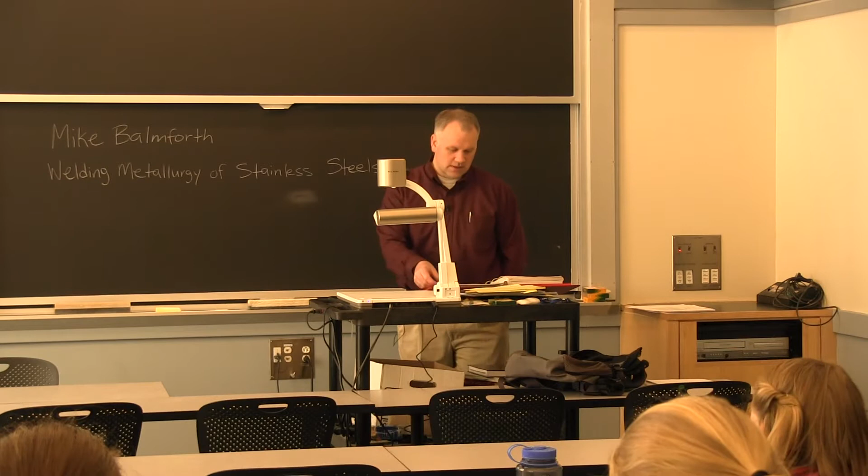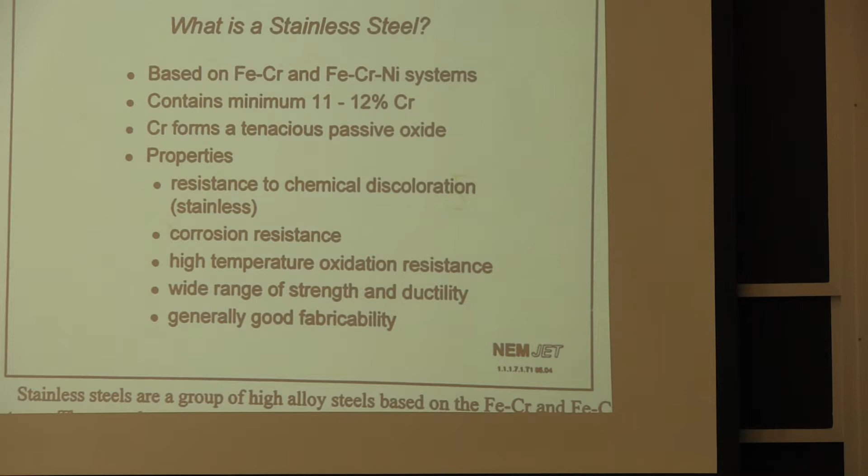So I wanted to start off by just talking a little bit about what is a stainless steel. Most of you probably, when you think of stainless steel, you think of this nice shiny silver metal that doesn't rust. And in most cases that's true, but stainless steel is not always stainless. There are things like sensitization, there are things like pitting, there are things like intergranular corrosion. If you mix up your stainless steel with your carbon steel and you get contamination, you can get rusting that way. And so as we talk about the metallurgy of stainless steel, we're going to be talking about things that could happen to that stainless steel to cause it to not behave like you want it to, which could be corrosion, could be rusting, it could also be cracking. There's a variety of things that can go wrong, and so we'll talk about some of those things.

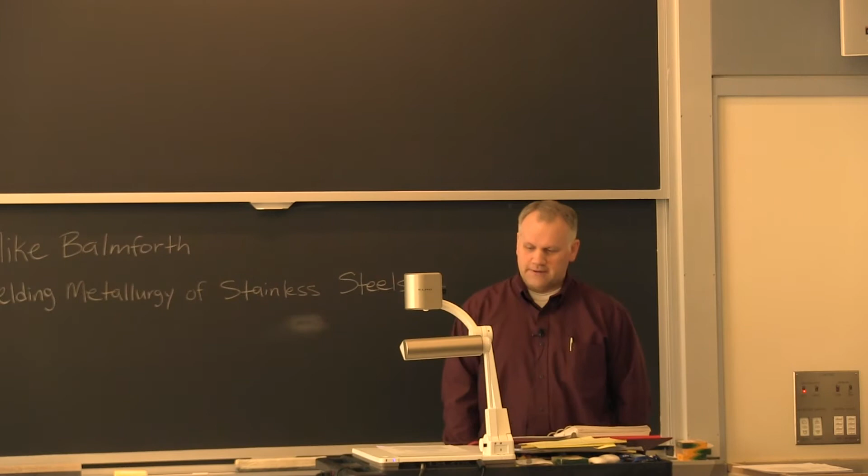But stainless steel, at its very basic sense, is an iron chromium alloy. And then many of the alloys also have nickel in them. And there's always going to be a little bit of carbon and a variety of other elements that we will talk about.

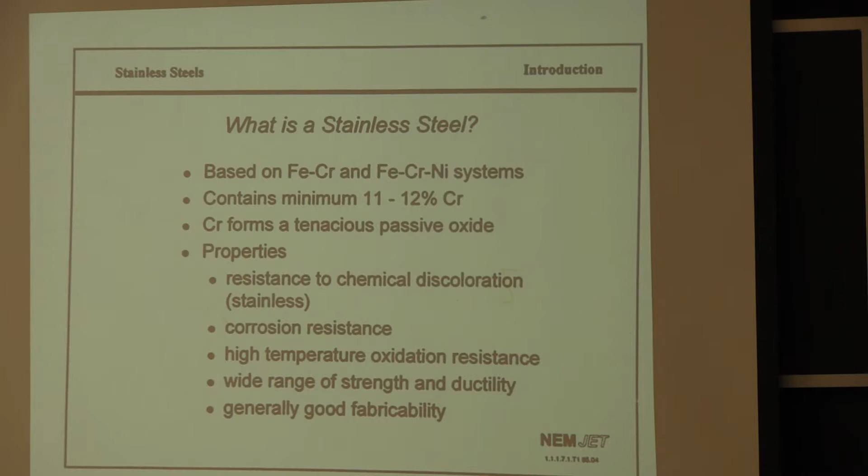But the main thing that makes stainless steel corrosion resistant, or makes it stainless, is the chromium content. And that's because chromium forms a very tenacious passive oxide, or an oxide that protects the underlying steel. It's a Cr2O3 oxide. And so whenever that oxide is there and nothing is wrong with it, then your steel is going to be stainless. But if it gets a scratch in it, or if it gets a corrosion pit in it, or a variety of things like that, then that's when we can run into problems.

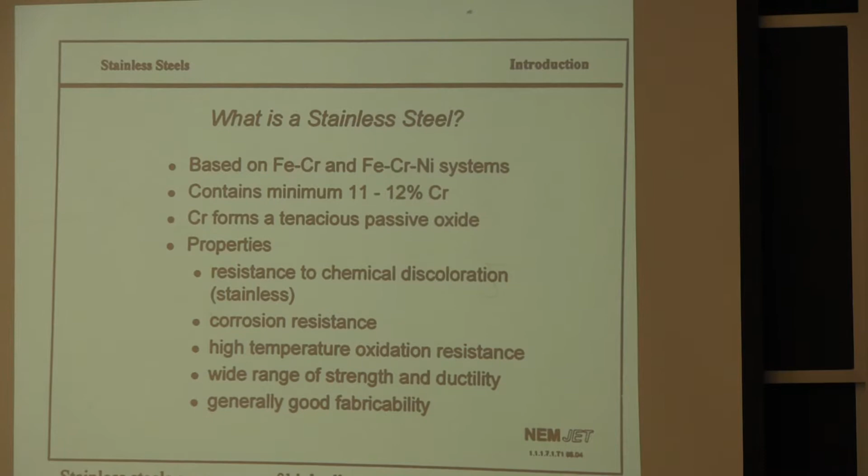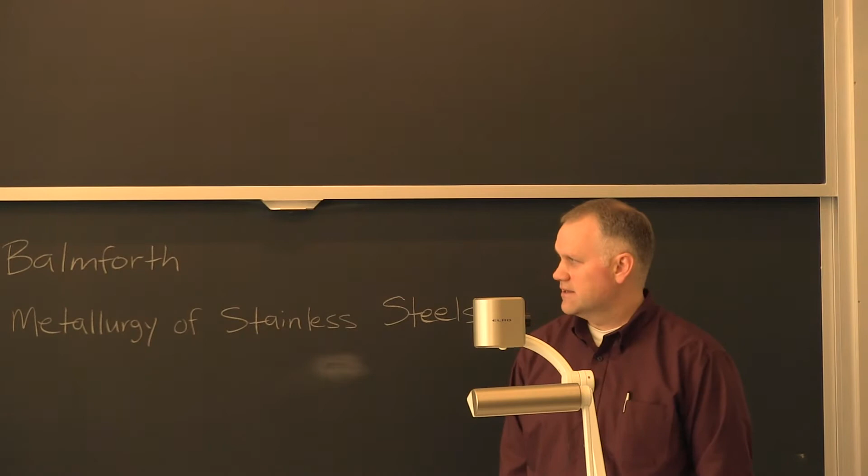But stainless generally is very resistant to chemical discoloration. And that's why it works great for your silverware and nice silver shiny instruments that you want to make and stuff like that. It's also generally very corrosion resistant. It's also got, in most cases, good high temperature oxidation resistance. There are a wide range of stainless steel types and alloys, so there's a wide range of strengths and ductilities. And it generally has pretty good fabricability, the ability to be formed and welded and other things like that.

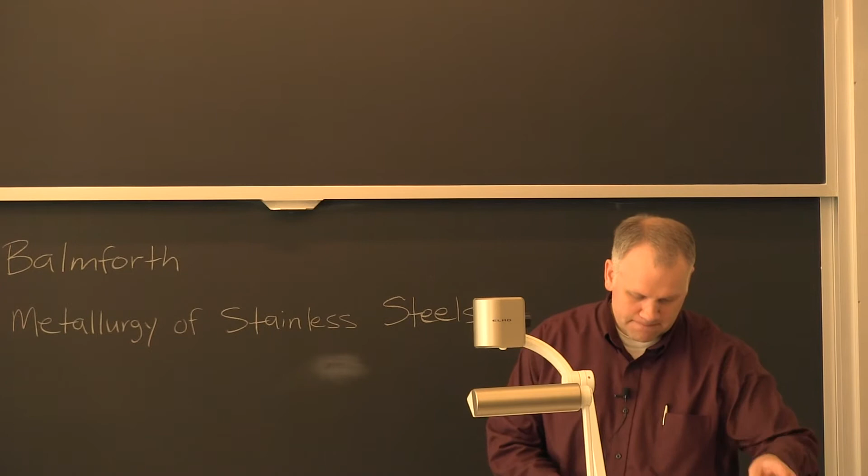Next thing to talk about a little bit is classifications of stainless steels. Stainless steels are classified by their microstructure. I hope that most of you have a basic understanding that microstructure is the structure. When you look at a polished specimen of steel under a microscope, you can see a variety of microstructures and phases and things like that. And the way that we identify stainless steels is by that microstructure.

There are 5 different classifications that we'll mention today, and if we have time, we'll talk about 3 of them. I don't think we'll get to duplex and the PH stainless steels, but martensitic stainless steel is, just like it says, a steel that is mostly made up of a martensitic microstructure. The same with the ferritics, mostly a ferrite microstructure. The austenitics, which are the kind of workhorse stainless steels, more used than the others, are a mostly austenitic microstructure, although when we get to talking about them, you'll see that we do like to have a little bit of ferrite in the structure. And then a duplex stainless steel is a stainless steel that is generally, typically about 50% ferrite and 50% austenite. And then the precipitation hardenable stainless steels are steels that are hardened by the strengthening precipitates that can form during heat treatment.

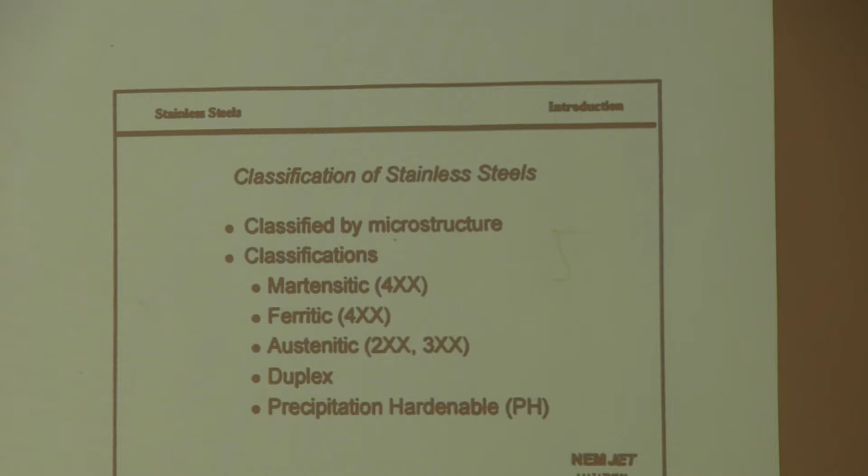A lot of people might tell you that you can tell if something is stainless or not by putting a magnet on it. And that's true for the austenitic alloys, because austenite, being a face-centered cubic structure, is not magnetic. But if you put a magnet on a martensitic or a ferritic stainless steel, it will actually stick. And so that's not always the way to tell.

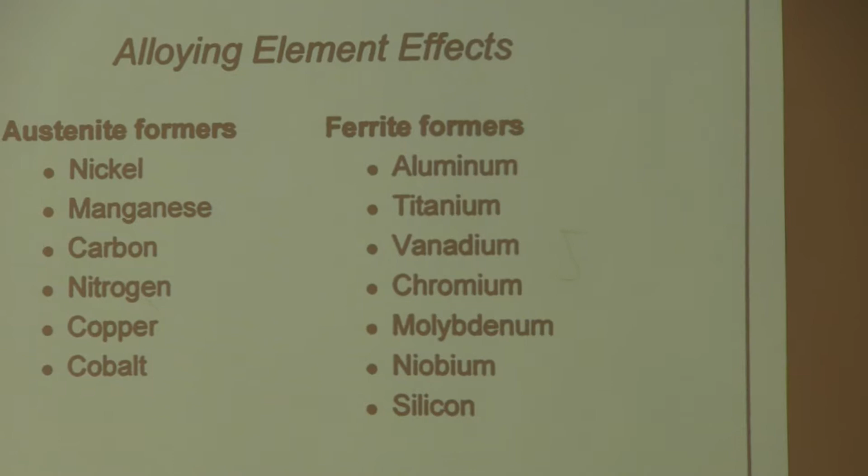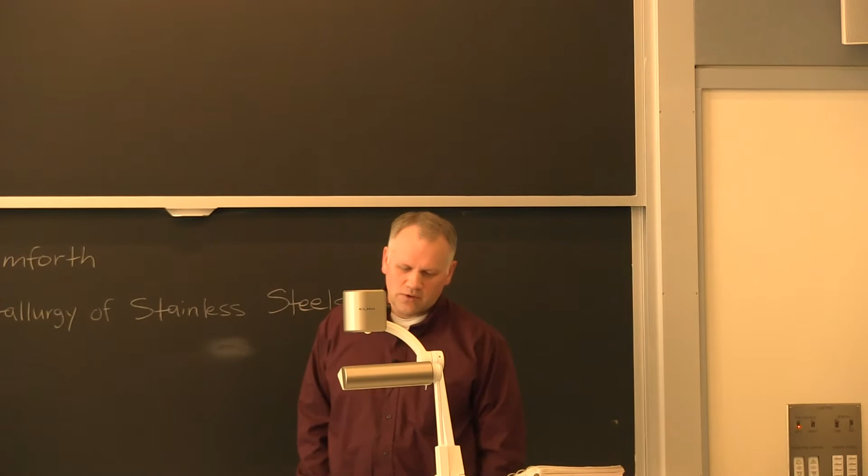I wanted to talk a little bit about some of the different alloying elements that we end up putting in stainless steels. They're broken down into two categories: austenite formers, which promote the formation of austenite, and ferrite formers, which promote the formation of ferrite. This can then solidify as ferrite, or austenite formers can end up being martensite, because when austenite cools down it can transform to martensite. The main alloying elements you'll see are chromium, which is a ferrite former, and nickel, which is an austenite former.

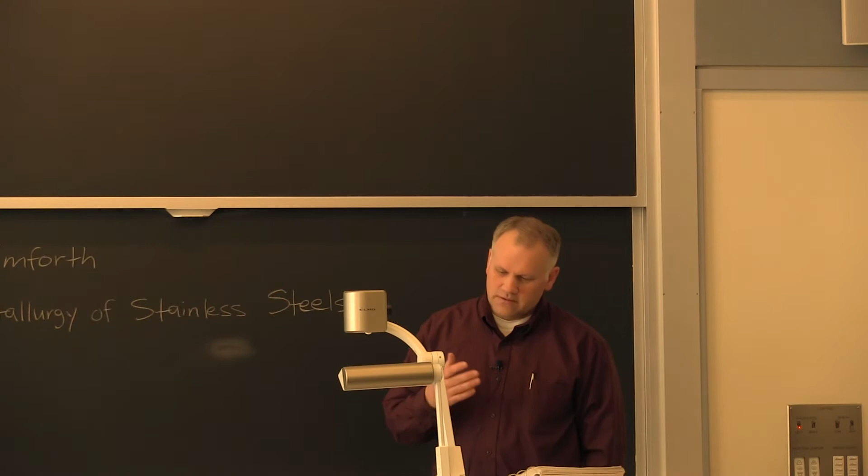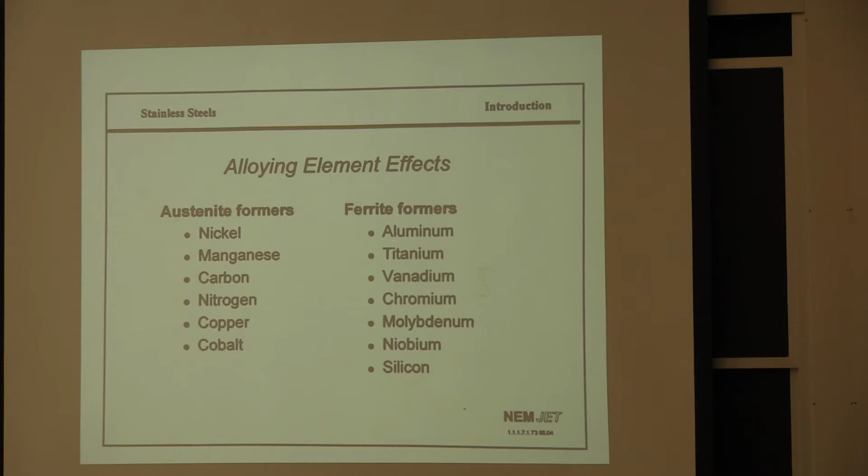There are various other things attributed to each of these alloys and reasons we put them in there. I don't think I'm going to take the time to go through each one individually, since I've got a lot of information I want to stress to you today. But if you're interested, it's easy to look that up in a handbook.

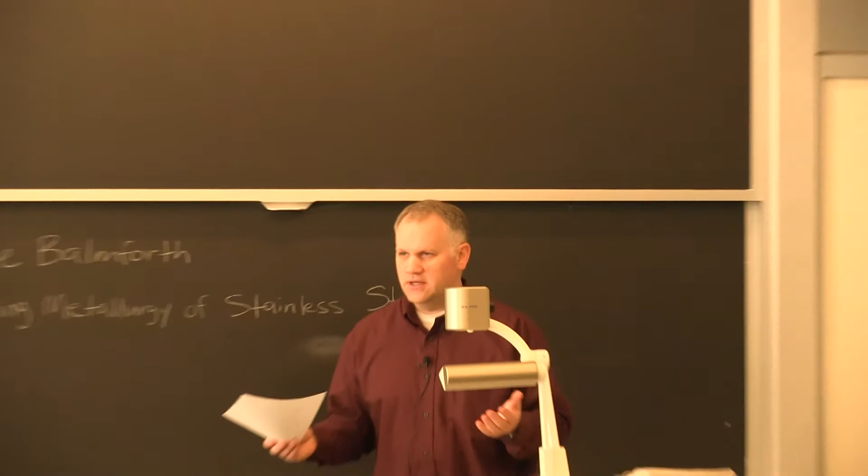These various alloying elements put in the batch when you mix up a stainless steel lead to a steel with a certain structure, which then leads to certain properties, and you can use it for certain applications. So it's very important to know what kind of structure you're going to get and how to best use that.

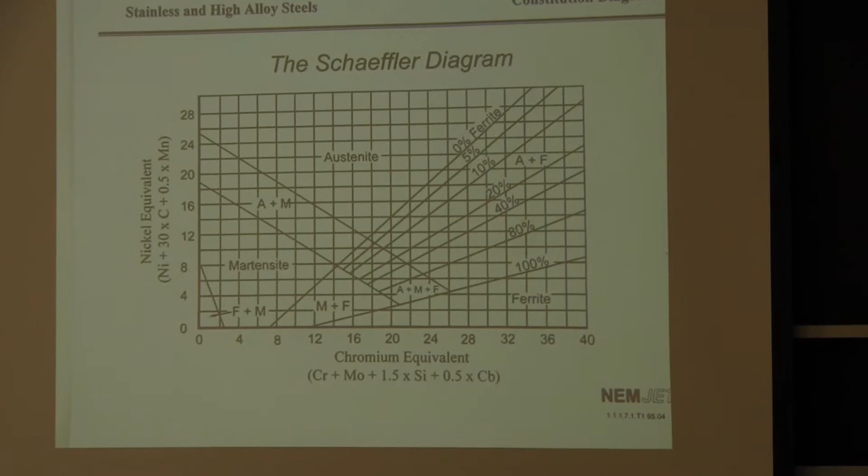This diagram was developed a long time ago by a guy named Schaeffler, and what it does is predict the microstructure of a given stainless steel. If you look at the axes, you've got a chromium equivalent along the x-axis and a nickel equivalent along the y-axis. They've taken the various alloying elements you might find in your stainless steel and made them equivalent to either chromium or nickel.

In doing the research to develop this type of diagram, you have to determine, for example, on the nickel equivalent, that carbon is about 30 times more potent in forming austenite than nickel is, whereas manganese is about half as potent.

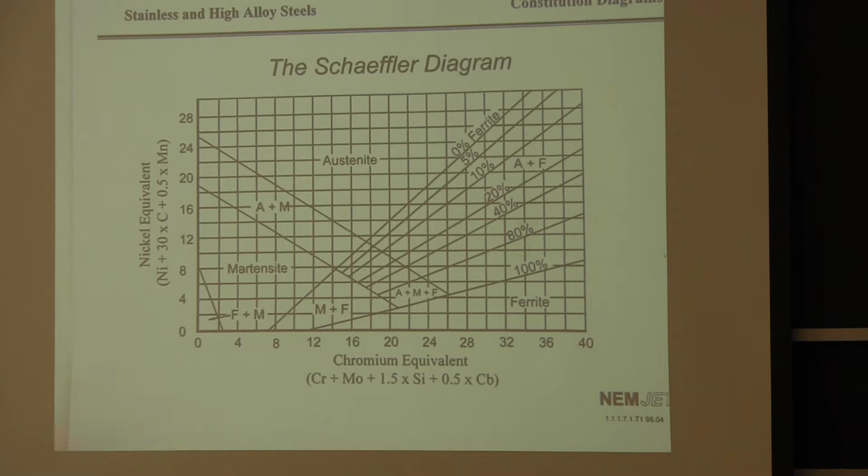So you can use this diagram. You take the composition of the steel you're going to be welding on, and plot it on these axes, and you'll find that your alloys fall in various regions depending on your composition. Up here you'll have the austenitic alloys.

These lines here are called isoferrite lines. This region over here is completely austenite, or 100% austenitic structure. But these lines tell you that you've got maybe 0, 5, or 10% ferrite in that structure. It's actually a good thing when you weld on an austenitic stainless steel that you get some ferrite in the material—it prevents cracking.

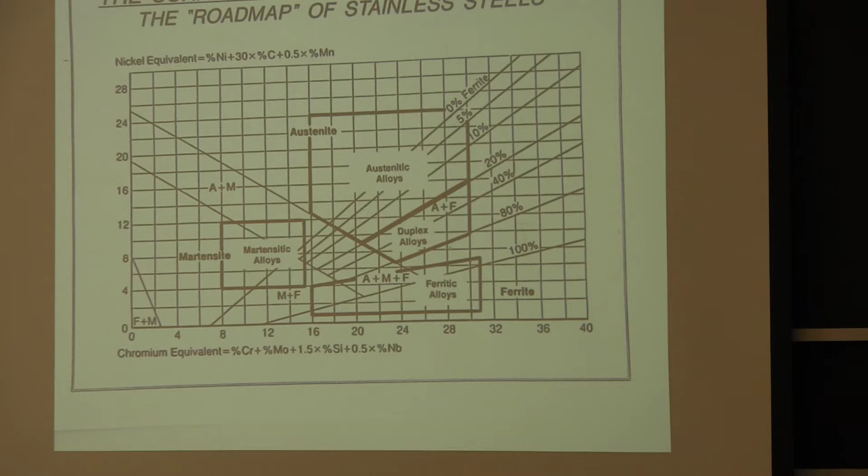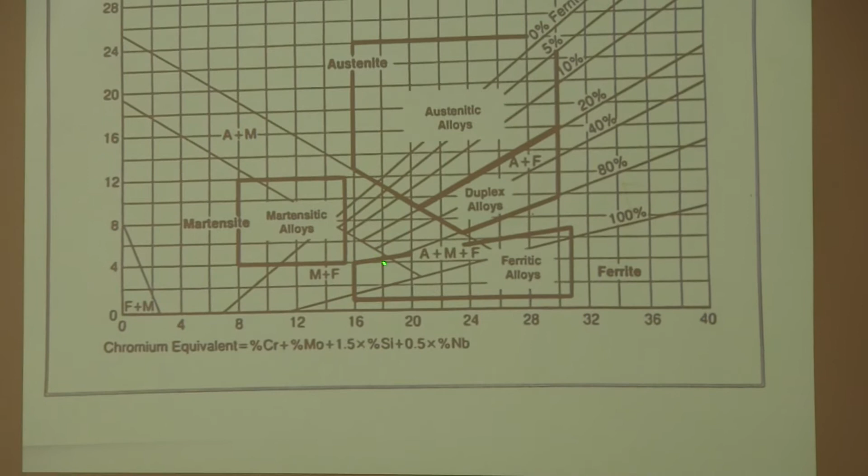Down here is where the ferritic alloys fall. The martensitic alloys fall over here, and you actually see that even in the martensitic alloys sometimes you get a little bit of ferrite. That's actually where most of my research was, in this martensitic to ferritic region down here—I developed one of these type of diagrams for that region.

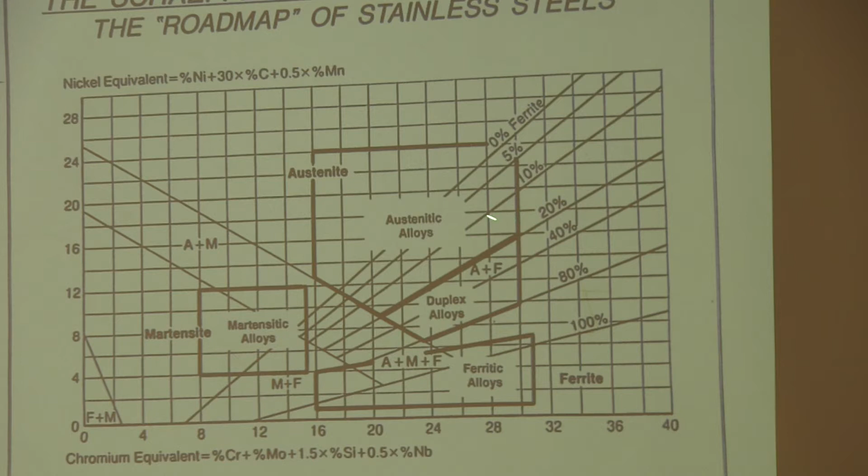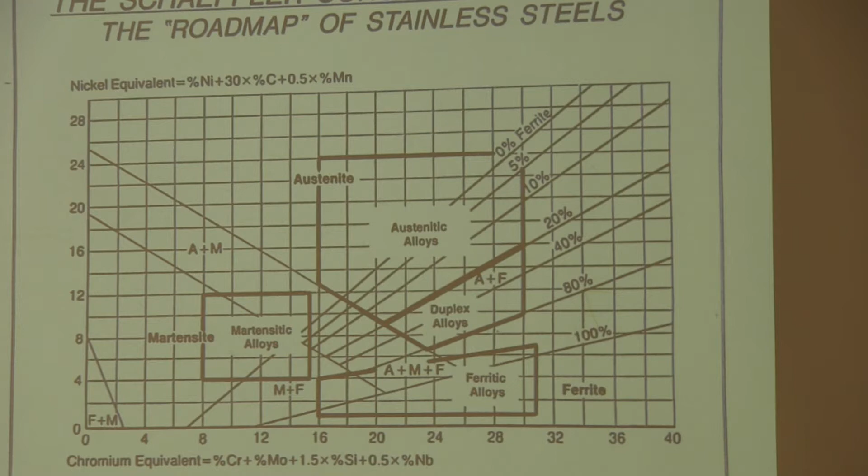The duplex alloys, like I said earlier, are in here where you've got both ferrite and austenite. This diagram, and the diagrams developed subsequent to it which are a little more accurate, are very useful when welding on a stainless steel to predict the kinds of structures you're going to get and how those can be used.

So, like I said earlier, stainless steel at its very essence is an iron-chromium alloy, and this is called a phase diagram. I believe Professor Eagar or Simone may have shown you the iron-carbon phase diagram. This is actually the iron-chromium phase diagram—over on this side you've got 100% iron, and over on this side you'd have 100% chromium, with everywhere between, here you've got 50% chromium, and the like. This axis is temperature.

If you take a 10% chromium alloy, for example, and come up through here, when it's liquid you're going to be up in the liquid phase. As it solidifies you come down through an alpha, which is a ferrite phase, and then come right along here. What you want in stainless steels is to be over far enough that you miss this, which is called a gamma loop.

That's where you end up with the gamma, or the austenite. As you solidify, in order to be corrosion resistant, you want to be over here far enough that you miss this gamma loop as you're solidifying.

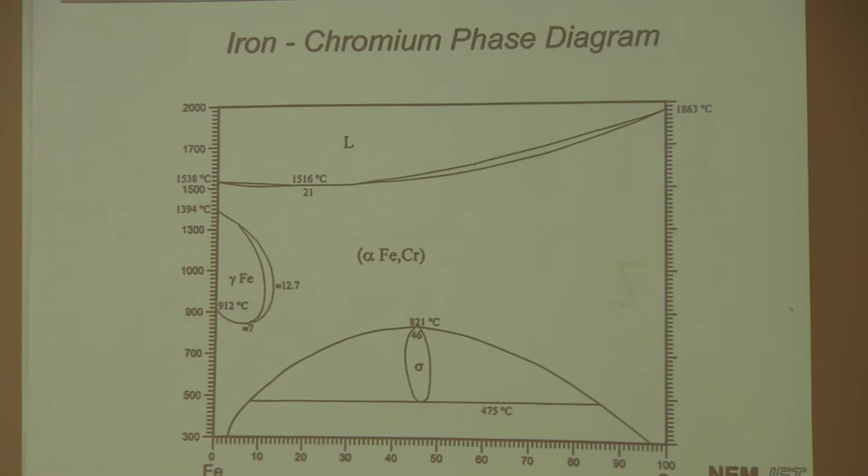I'm going to show you a few other diagrams. I'm not going to spend a lot of time on them.

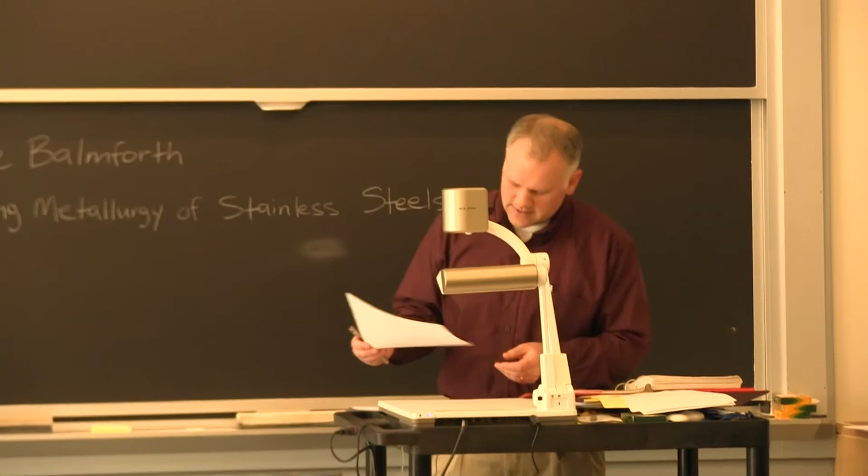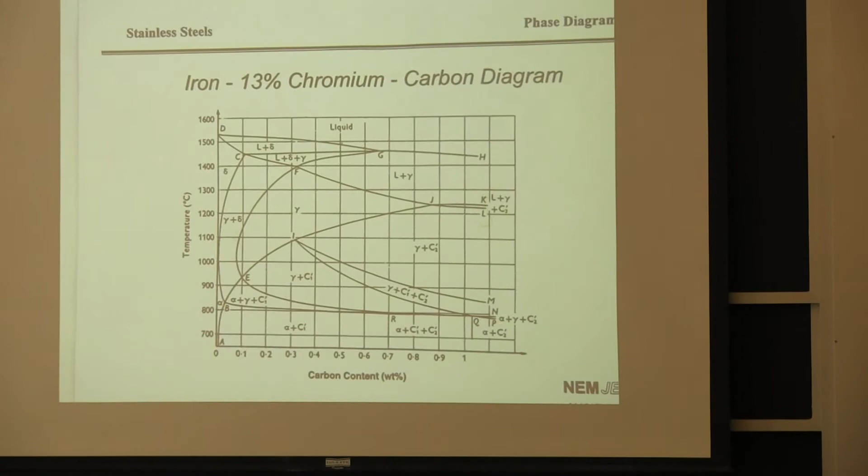But maybe as we're talking about the specific alloys, we'll come back to them. So this is what's called a pseudo binary diagram.

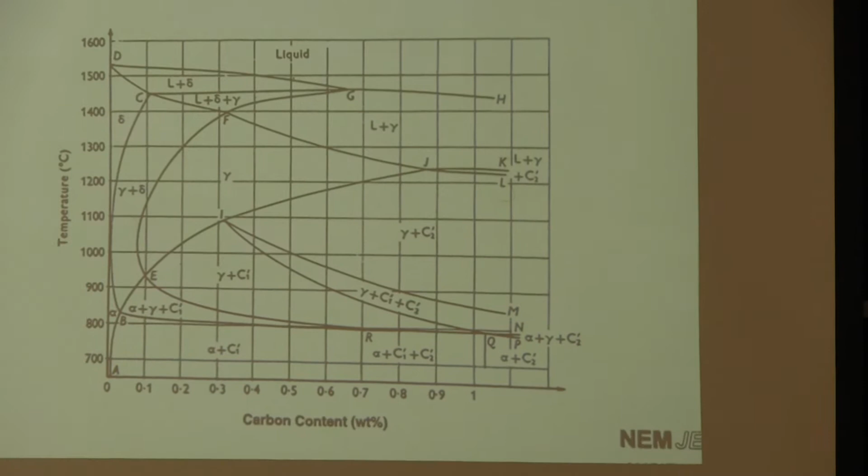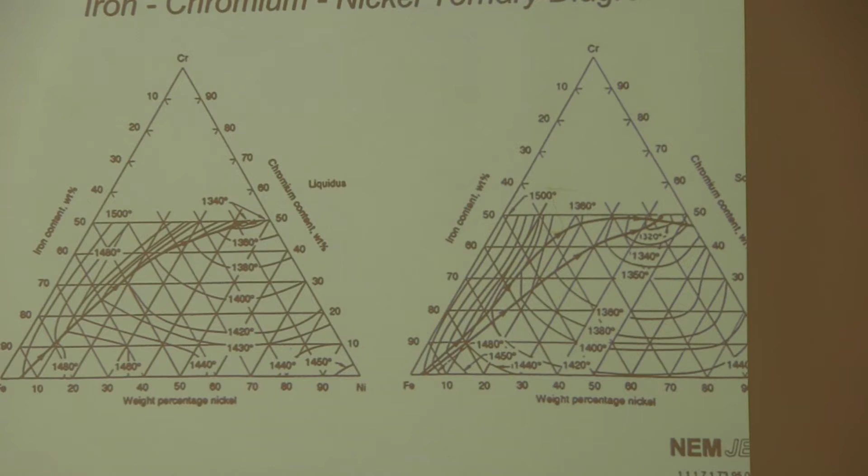Basically, this is a diagram that is taken by holding chromium constant at 13%. If you have 3 elements, you can actually do a phase diagram that looks kind of like this, and they're actually 3-dimensional diagrams, so they're kind of hard to visualize in 2D. But what you can do is take a slice out of one of these diagrams, and then you get something like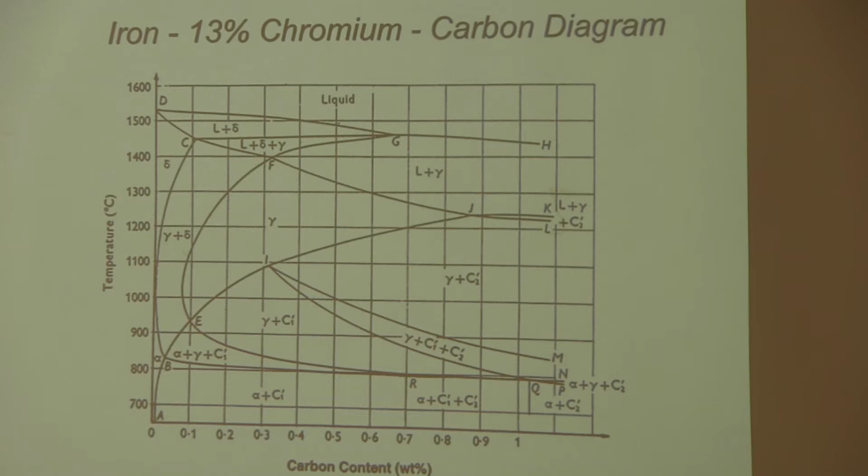this for iron, chromium, and carbon, or you get something like this for iron, chromium, and nickel.

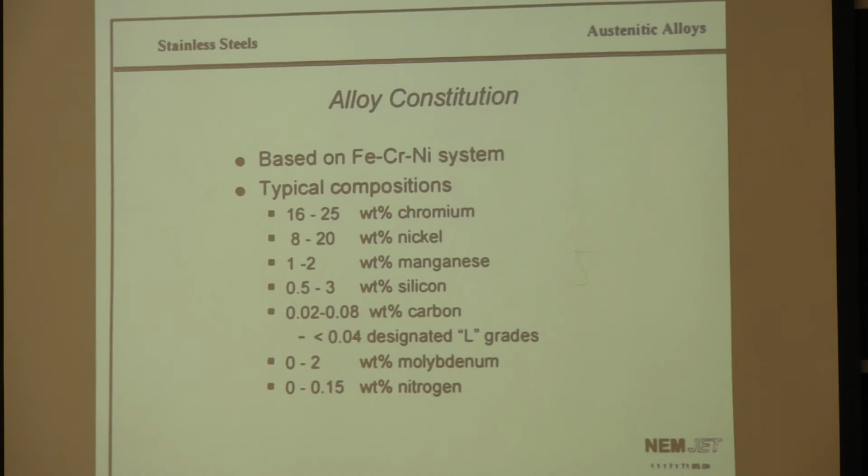We'll use these a little bit later when we talk more about the specific alloys. So like I said, the austenitic alloys represent really the largest group of stainless steels, and they're produced in the highest quantities. This is why when people talk about stainless, and they talk about it being non-magnetic, or they talk about the largest uses of stainless steel, you're typically going to be talking about austenitic alloys.

And they're based on the iron, chromium, nickel system. So besides the chromium, you're also adding nickel to this system of alloys to produce the austenite. These are the typical compositions. You're always going to have that high amount of chromium to keep things corrosion resistant, and then you've got the nickel to promote the austenite formation, and then you've got all these other amounts of other elements that can be added to the stainless steels depending on the application and what you're trying to do.

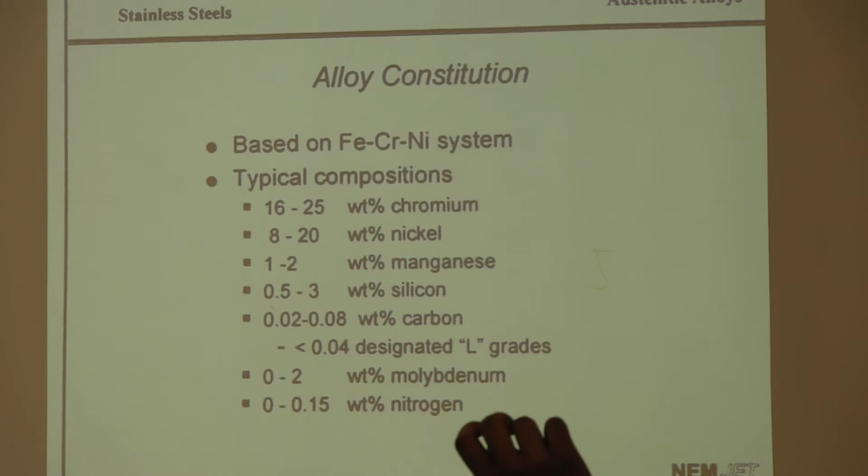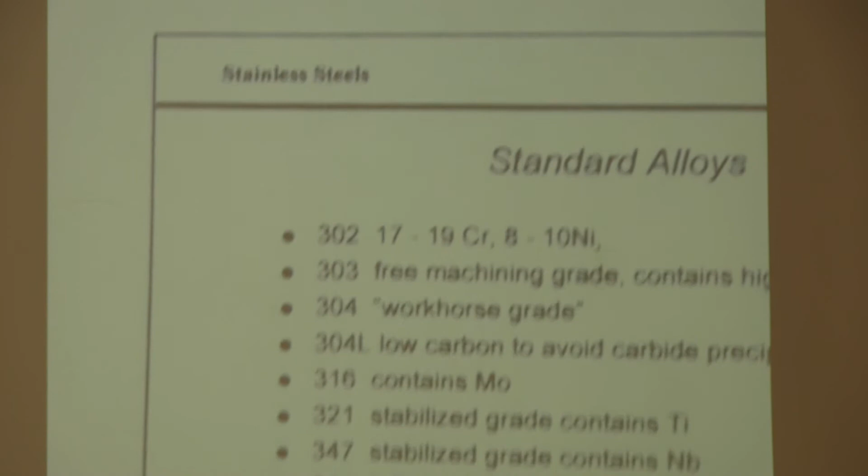Just spend a couple of minutes on some of the standard austenitic alloys. The workhorse grade, or the one that you would probably see used the most, it's the most economical of the austenitic alloys, is 304. Oftentimes you'll also hear about a 304L, which is a low carbon version of the 304 stainless steel.

There's a wide variety of austenitic stainless steels, but like I said, they are the most commonly used. 304 is kind of the centerpiece alloy, and it's the most commonly selected austenitic grade as well. 316 is probably the next most used, and it substitutes a little bit of molybdenum for the nickel. You have a question?

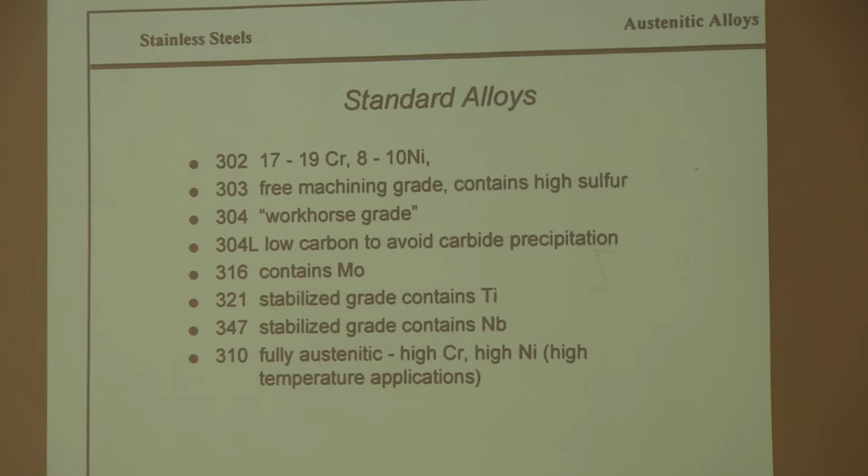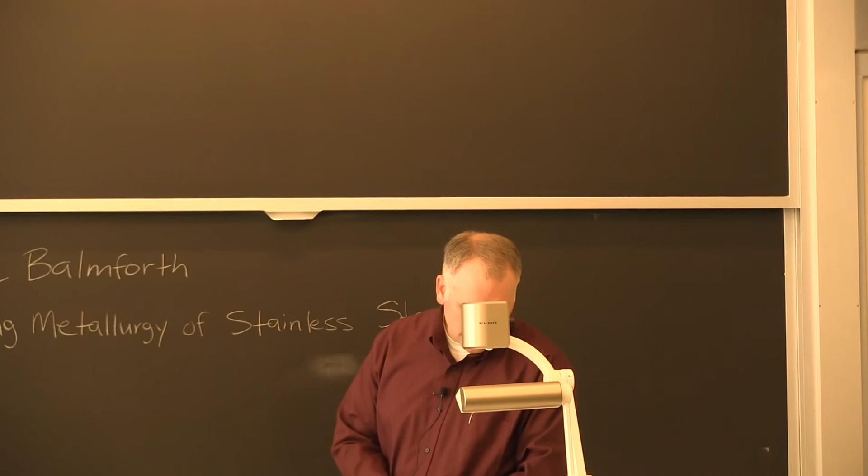Well, the sulfur actually almost acts as a lubricant in machining. I'm not 100% sure on the work hardening of that, but that would make sense, that it wouldn't work harden quite as much, because that is one of the problems with austenitic stainless steels is they're a little bit gummy when you're trying to machine them.

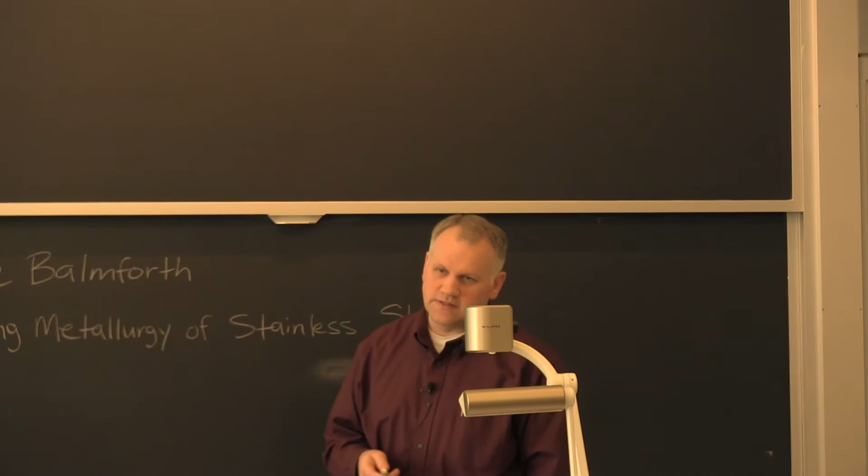What is it about austenitic alloy that makes it non-magnetic, especially considering it has a lot of nickel in it? Well, the nickel actually in this alloy system is an austenite promoter, and so the austenitic alloys solidify with a face-centered cubic microstructure, which is an austenitic non-magnetic microstructure. So it's really just the austenite that's formed that is a non-magnetic structure.

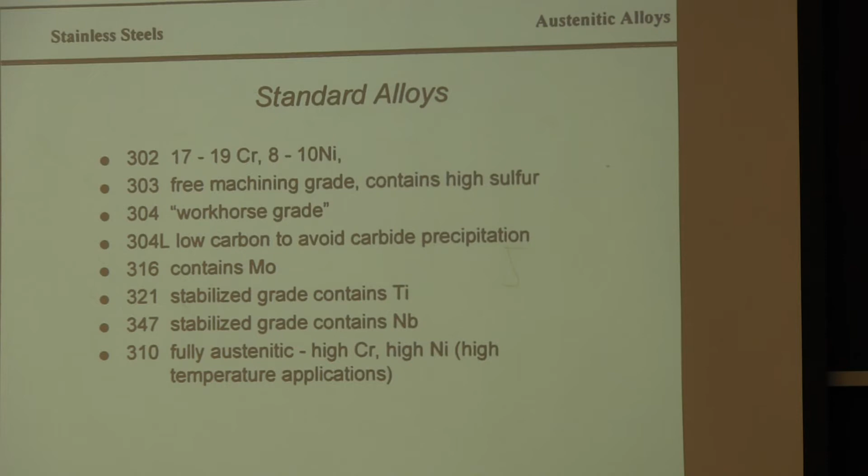Another one that I'll mention is both the 321 and the 347. They're what's called stabilized grades. We're going to talk a little bit about intergranular corrosion of stainless steels, and the titanium and the niobium that are in those grades will tie up some of the chromium carbides that would normally be formed, and they'll prevent some corrosion, what's called intergranular corrosion.

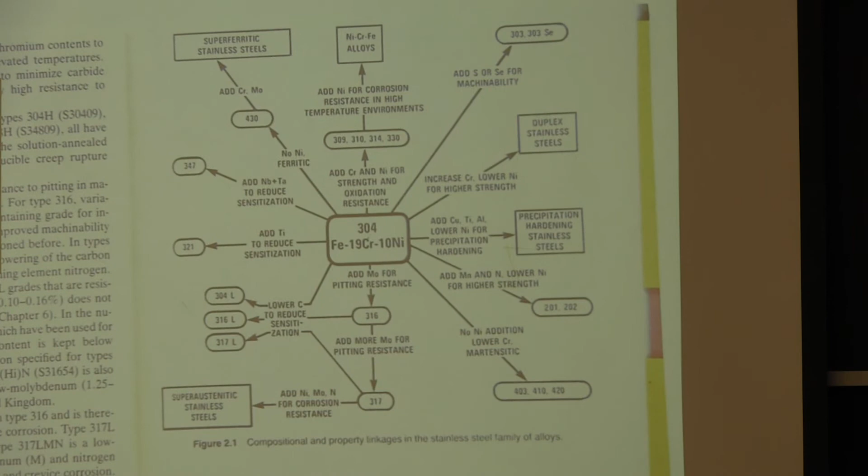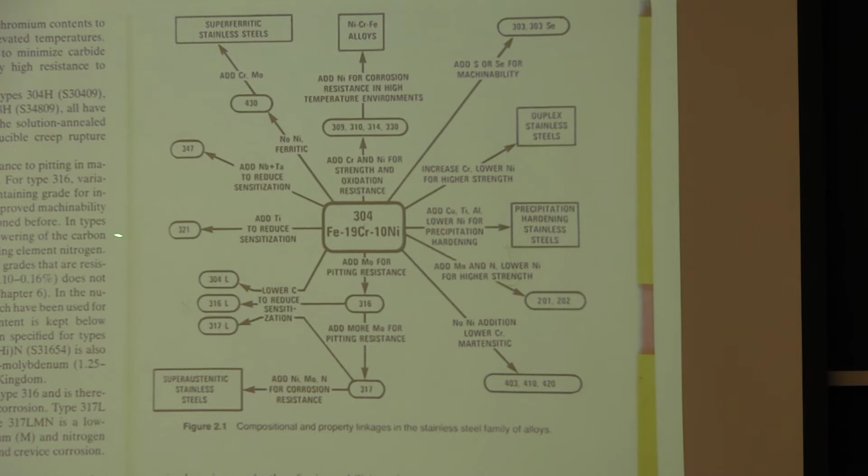So this is a diagram that Professor Eagar actually gave me the other day, and what it is, it's just kind of a diagram that demonstrates that 304, like I said, is kind of that centerpiece alloy of the austenitic stainless steels, and then depending on what you're adding or subtracting, if you're adding a little bit of molybdenum, then you come down here to the 316 alloys.

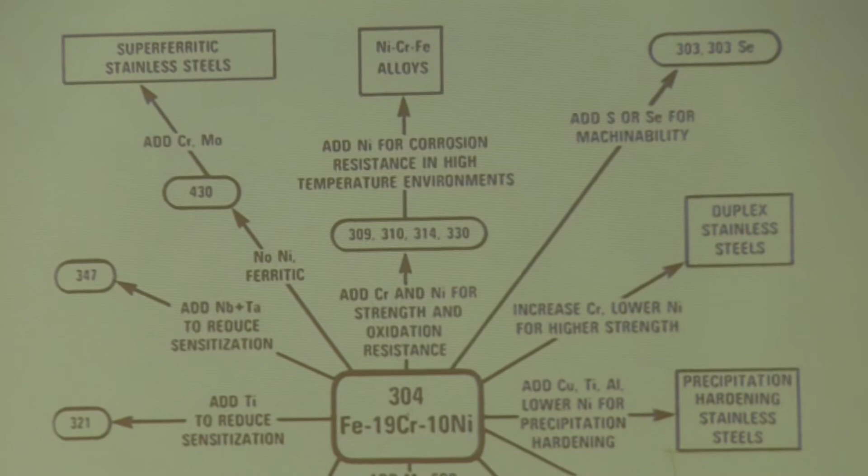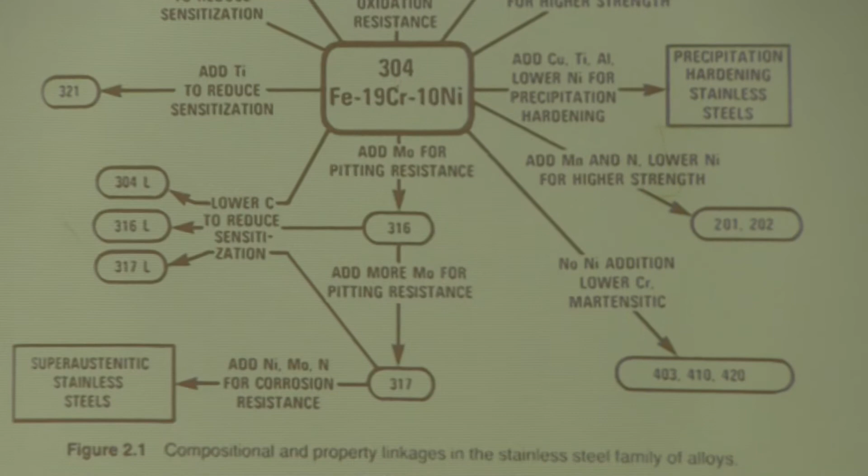If you end up adding a lot of chromium, you actually move all the way over to the ferritic alloys. The more nickel you add, the closer you move to the nickel alloys, which we'll actually talk about in a few days when I lecture again. So the real essence of this is that the 304 and then various modifications of that are at the centerpiece of the austenitic alloys.

Some typical applications for the austenitic alloys. They're really used in a wide range of alloy applications, but they can be used structurally. They can be used for containment. They can be used for architectural or kitchen equipment, medical products. One of the reasons that they're widely used is because they are fairly corrosion resistant, but also they're readily formable and fabricable. They're probably the easiest to weld on as far as the stainless steels.

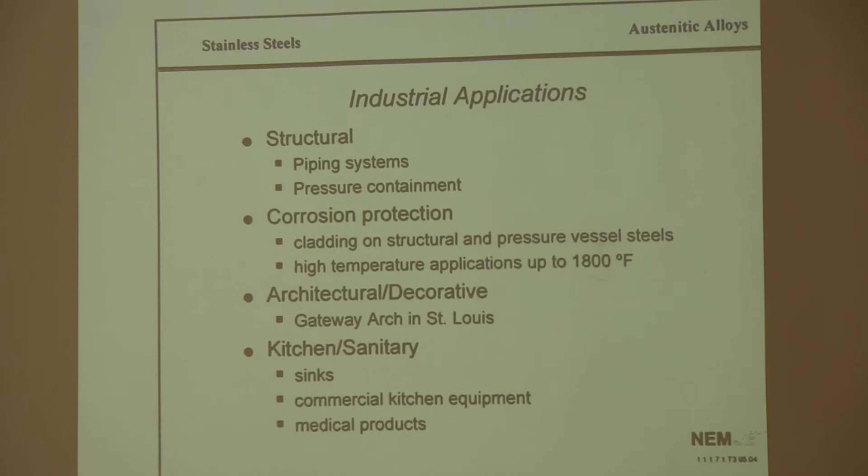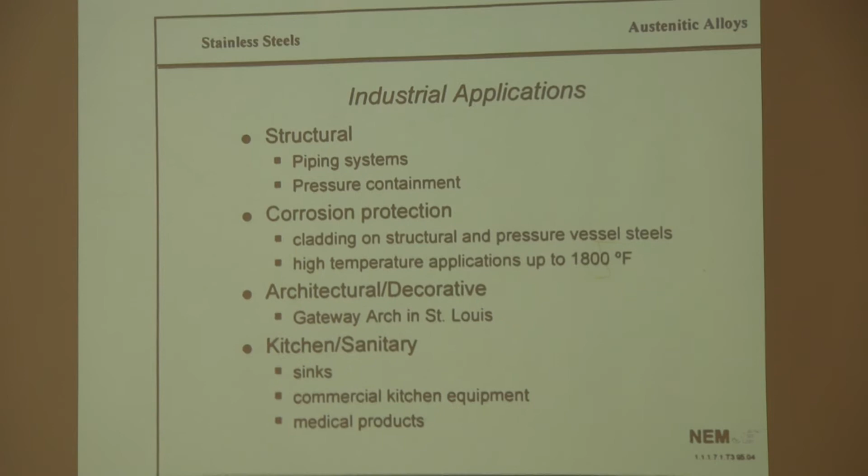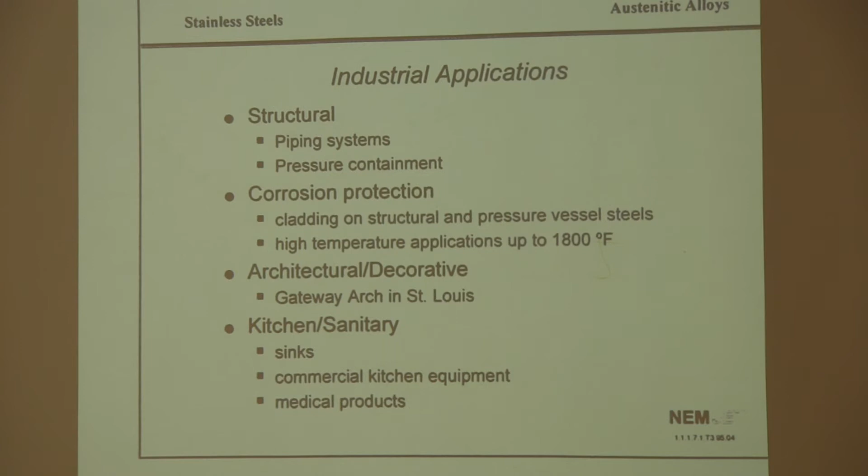One thing that is good to mention is that the austenitic stainless steels are not suitable for chloride-containing environments or highly caustic environments, because those are the environments that do lead to stress corrosion cracking and intergranular corrosion and other types of corrosion with austenitic stainless steels.

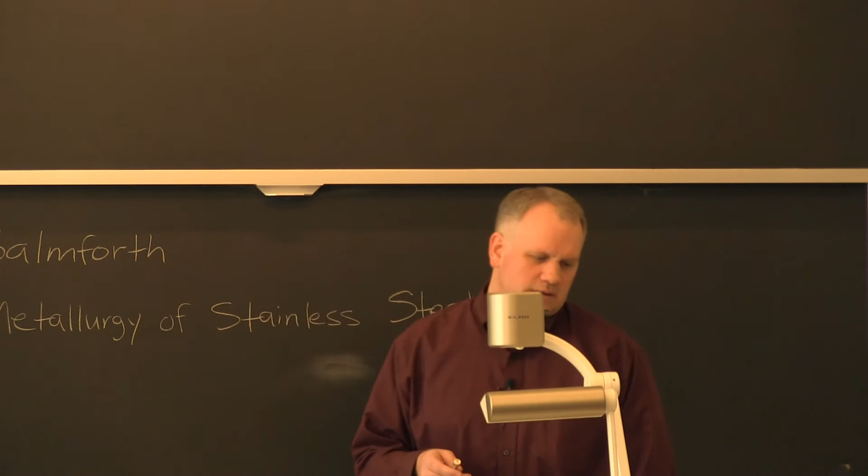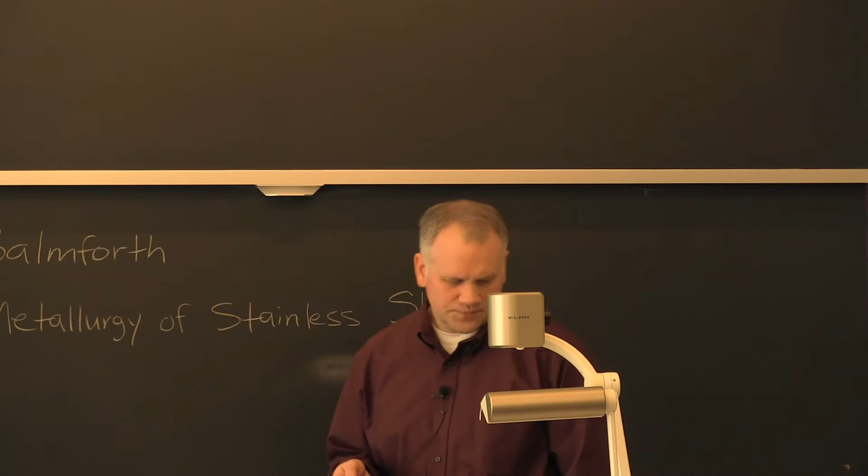Yeah, I mean, anything with chloride in it, it's really a problem where there's some kind of stress, but when you've got welding, you've always got some residual stress. And so we often find when something has cracked or there's been a problem, it's called stress corrosion cracking, and I think Professor Eagar, if he hasn't talked to you about that, will be talking to you about that in more detail. But if you've got stainless steel pipes under your sink and that's where you store your bleach, then sometimes it can be a problem.

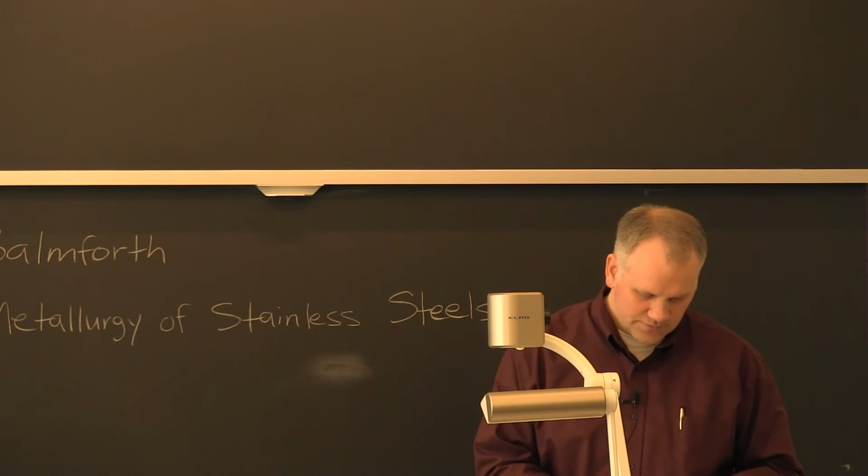Some things to consider when you weld austenitic stainless steels: because they don't precipitate or aren't hardenable, there's no need to preheat them. It is important, because of the phases that can form, that you watch the interpass temperature if you're doing multiple welding passes on austenitic stainless steels.

Again, because they're not hardenable, there's not really a need to post-weld heat treat austenitic stainless steels either. You can stress relieve if necessary, but you need to consider the carbides that could form, and sigma and other brittle phases that can form in these alloys.

Filler metals typically used in welding austenitic stainless steels are either matching, or 308 and 309, which are very common. For 304, for example, this is because of the solidification microstructure you end up with, which has some ferrite in it - that's what we're going to talk about in a minute.

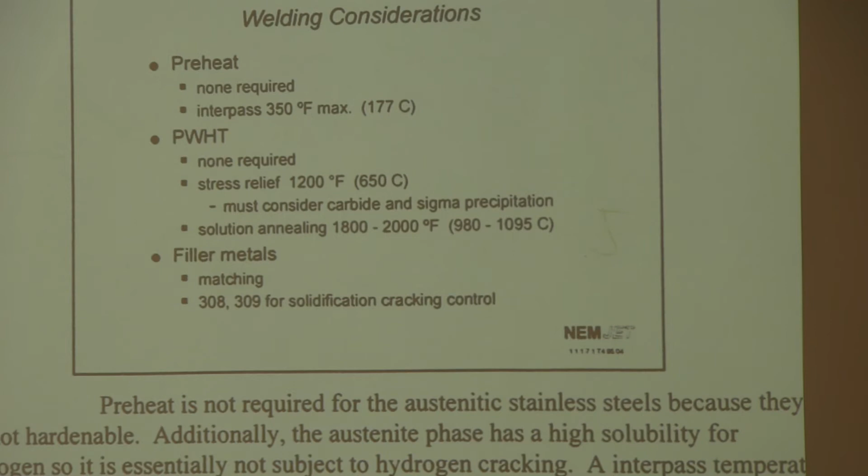It's very important with stainless steels that you weld in an inert environment, because at high temperatures chromium oxides form very rapidly, and you get what's called sugaring - this black oxide all over everything.

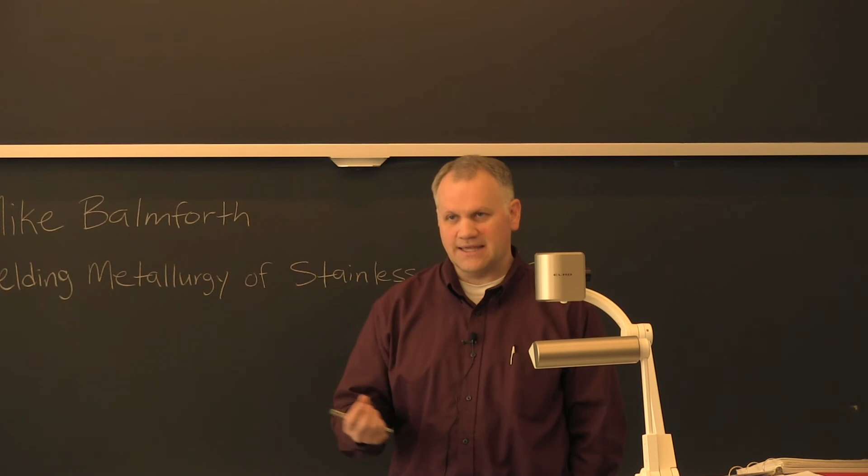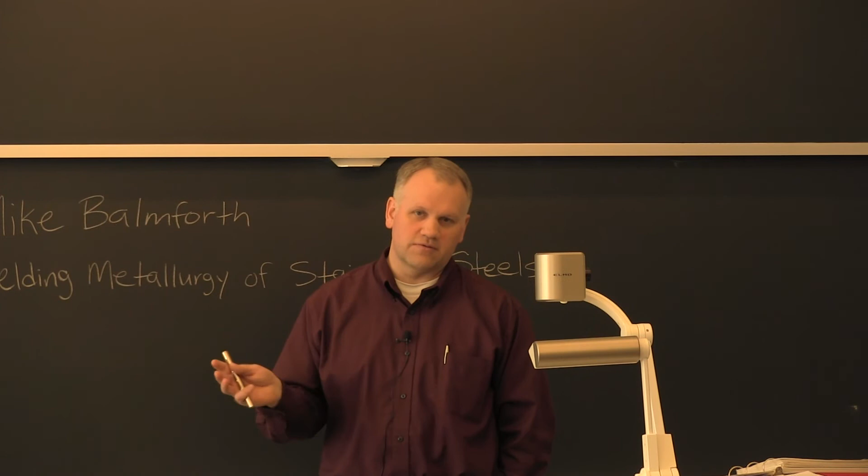That can be done in a variety of ways. It can be done with shielding gas, where you blow gas through the welding torch. A lot of times you also have to set up some kind of backing gas system, blowing gas on the backside. I used to work for a national lab where we welded stainless steel parts in glove boxes because we wanted to be very careful that there was no outside contamination at all.

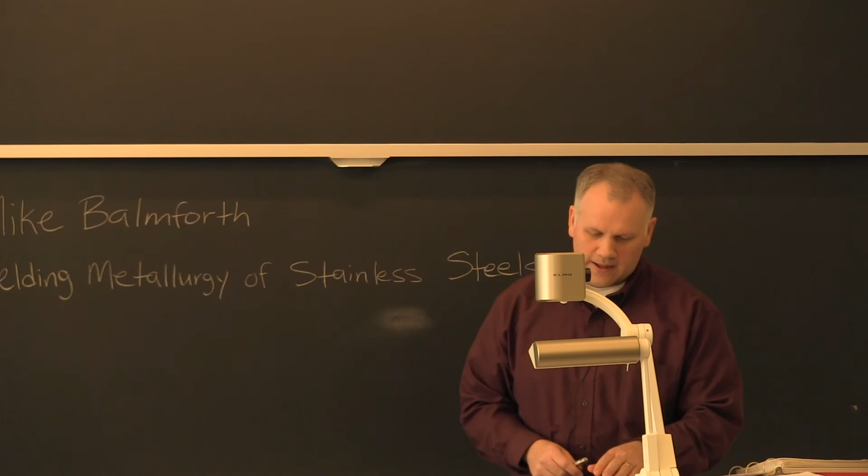Next I wanted to talk about some of the issues that can arise when welding on stainless steels. Probably the biggest issue to be aware of when welding austenitic stainless steels is solidification cracking, which is basically cracks that form in the material after you've welded on it as it's re-solidifying.

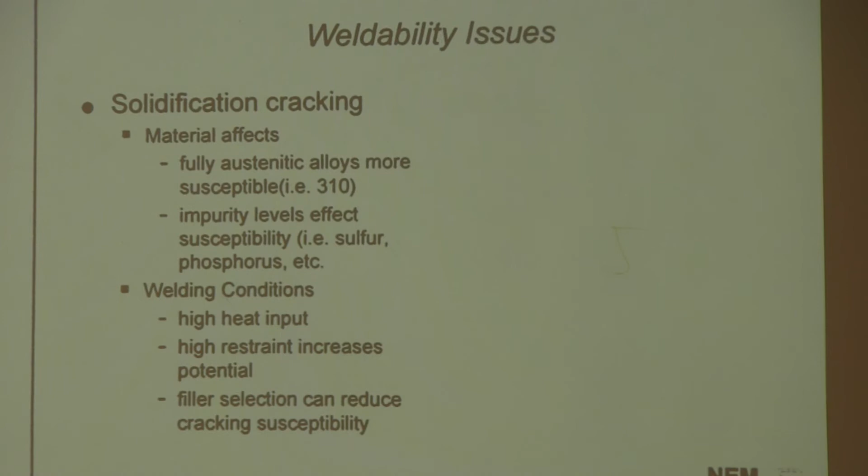What you find is that fully austenitic alloys are more susceptible, and also impurity levels like sulfur and phosphorus matter, because as a material solidifies, those impurity elements get transferred to the boundaries created as the material grows together, creating a low melting or eutectic phase that's much more susceptible to being pulled apart as shrinkage stresses are created during solidification.

So some of the things you can do: you can try to minimize your restraint, you can watch your heat input, and you can also use the right filler material, which we talked about - 308 and 309 are typically used.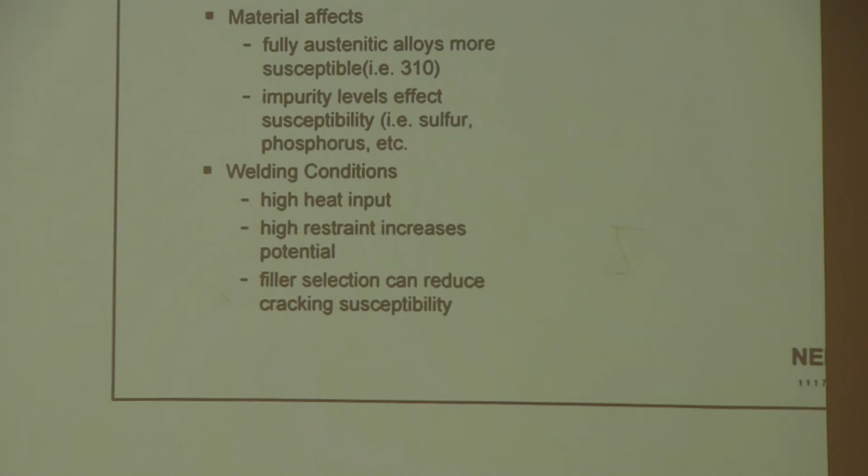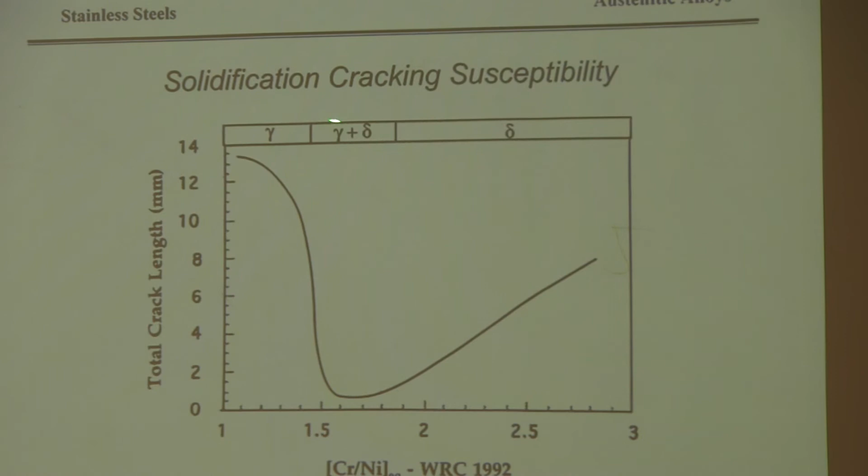What this region up here is telling you is this solidified as austenite - gamma is the symbol that represents austenite. Here is austenite plus ferrite, or delta, and then completely delta, completely ferrite over here. So in order to avoid cracking in your stainless steel welds, you really want to solidify right in this region, which is austenite with just a little bit of ferrite.

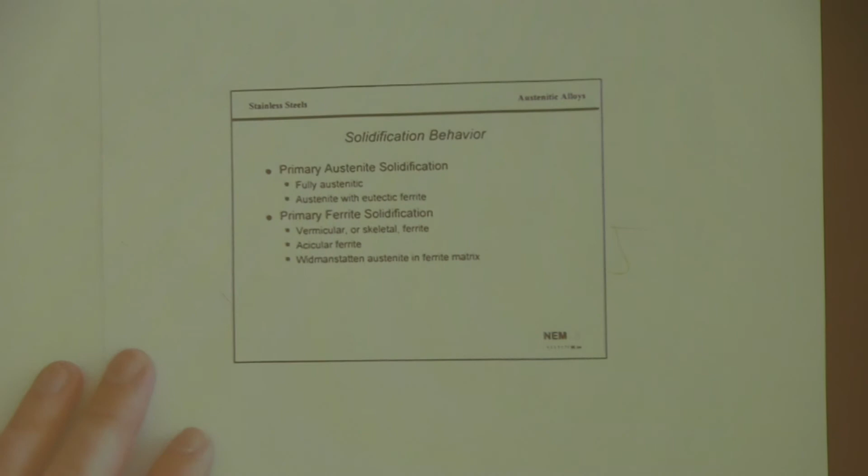Solidification behavior of stainless steels is actually something you could teach an entire course on, so I'm going to try to go through it quickly enough, but in enough detail to give you some understanding.

When an alloy solidifies, you can use those phase diagrams I showed you before - I'll put one up here in a minute. You can either solidify from the liquid as austenite, and then have some transformations in the solid state, or you can solidify as ferrite, and then as it cools, have further transformations in the solid state.

So there's something called austenite solidification, or A-type solidification. You can get fully austenitic if you're far enough over on the phase diagram. If you're a little closer to the boundary, you'll still end up with a little bit of ferrite, and that's called AF solidification.

Or you can solidify as ferrite, which then partially transforms back to austenite as it cools - that's called FA solidification. These are different types of ferrite that will be formed. Down here you get something called Widmanstätten austenite in a ferrite matrix - that's where it solidifies almost entirely as ferrite, and then at the very bottom, sometimes along the grain boundaries, you get a little bit of austenite that reforms, and that's called F-type solidification.

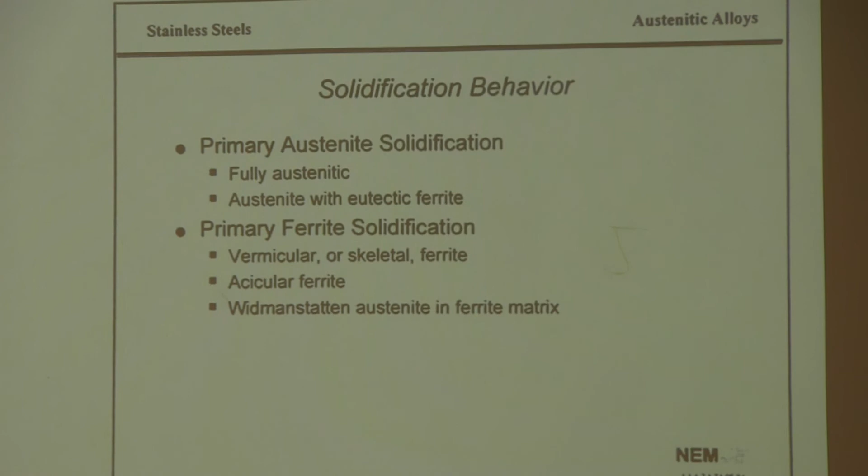So this is graphically demonstrating what I was just talking about. Over here is the austenite solidification, and the furthest one on the left is A-type solidification, where as you're solidifying from bottom to top in this picture, basically everything is transforming to austenite.

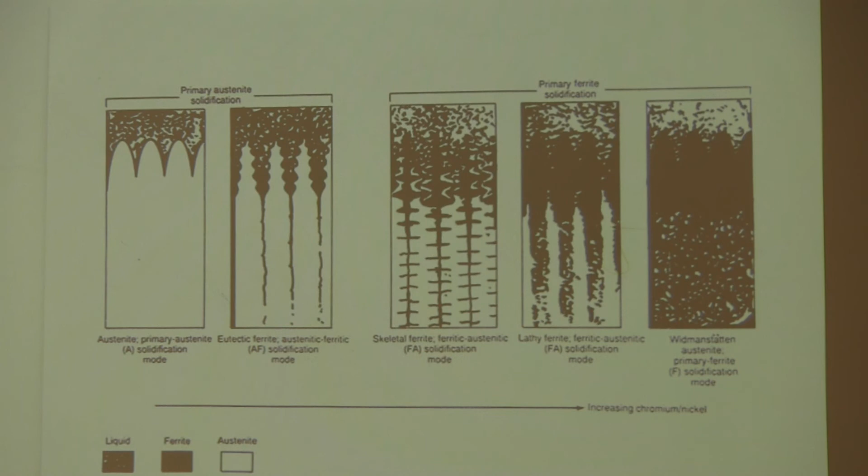The white is austenite, and you get a completely austenitic structure as it solidifies. If you're a little bit further over on the phase diagram, as you solidify austenite along the boundaries of those solidification dendrites, you do get a little bit of formation of ferrite, and that's called the AF solidification mode. Then these two here are the FA type solidification modes, where you're actually solidifying as ferrite, but then as it cools, you're getting a transformation back to austenite, and what it leaves is this little lathy or skeletal structure of ferrite, basically at the cores of those dendrites.

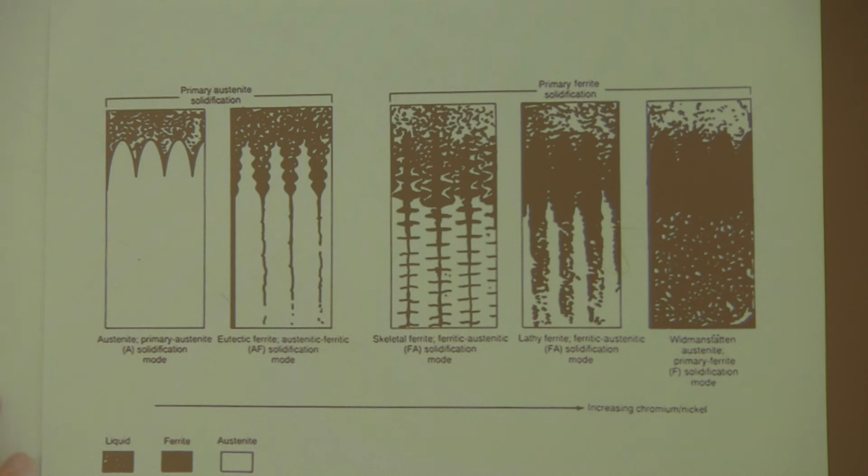Something that you don't see very often in stainless steels actually is complete ferrite solidification, or F-type solidification mode.

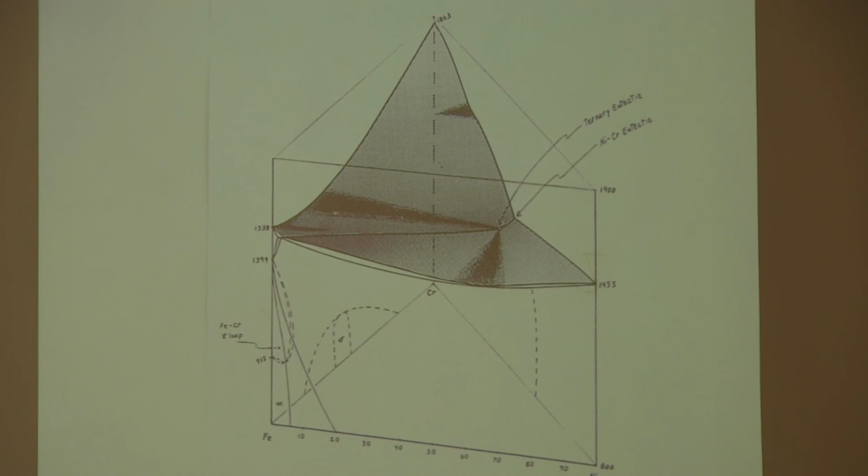I'll just put these up here quickly. This is just to show you kind of how you get these phase diagrams that I was talking about earlier. If you had an iron, chrome, nickel phase diagram in 3 dimensions, this is kind of a two-dimensional representation of what that would look like. But what you can do is take a slice of that, and that's what's shown here.

If you slice this off basically at 70% iron, which is a typical composition of austenitic stainless steels, then you can look at this surface here, which is exposed by making this slice, and then you've got what we call a pseudo binary phase diagram. Here you see that over here you get solidification completely as austenite, whereas over here you get solidification completely as ferrite. Right in this middle region is where you get sometimes austenite and ferrite together, and that's where most of our stainless steels actually fall, in that region.

Something that was developed much later than the diagram that I showed you earlier, the Schaeffler diagram, was developed by the Welding Research Council, so it's called the WRC 1992 diagram. What they did is they modified these chromium and nickel equivalents, and basically this is the region between austenite and ferrite, so it's just a small section of that Schaeffler diagram. They also drew on here the solidification modes. So above this line here you get completely austenitic solidification, and you can then see the AF and the FA and the F-type solidification as well on this diagram.

What they've done over here with these isoferrite lines as well is they've changed to something called a ferrite number, which instead of being a percentage of austenite and ferrite is actually a magnetic reading. There are various instruments that can be used to determine the ferrite number. One is called a Magne-Gage. I think Professor Eagar has one of those in his lab. Basically, you stick a magnet on there, and then you measure the force that's required to pull. So the higher the force, the more of the magnetic ferrite that's actually in the material.

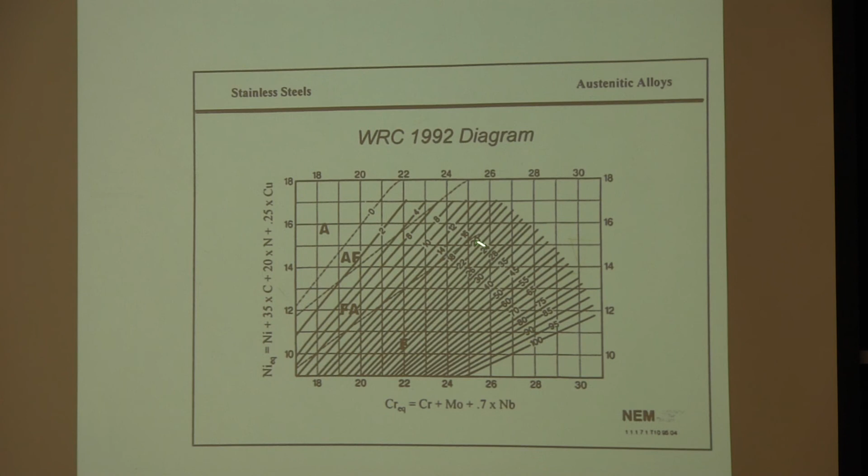So in order to avoid cracking, like I said earlier, you want to really be in this FA type solidification range. So as you figure out the chromium and nickel equivalents of the material that you're welding on, and you can also figure those out for the filler material that you're using, then you can figure out where you're going to end up on this diagram and whether you're going to be susceptible to cracking or not.

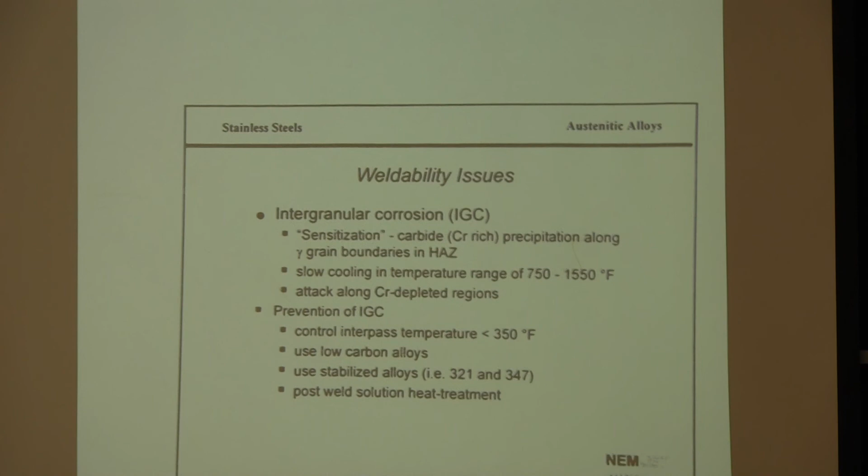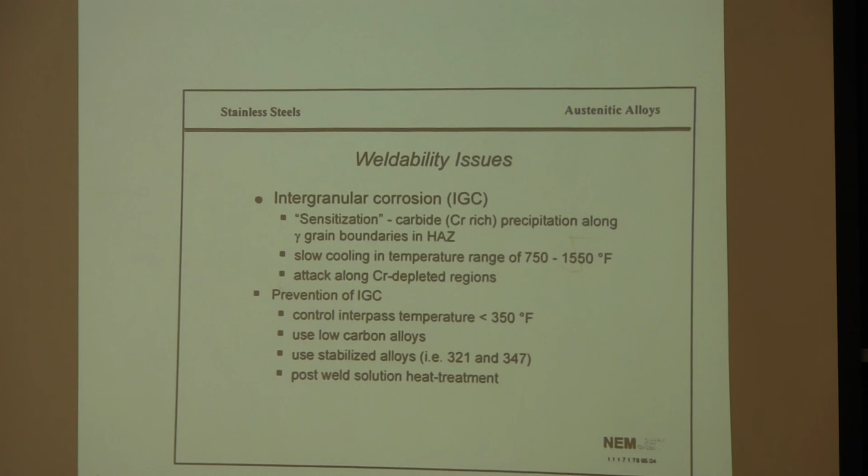Basically, when you weld on one of these types of stainless steels, you've got boundaries between the grains in your microstructure. If you get this what's called intergranular corrosion, you get all these little corrosion ditches along the boundaries of the material. You can actually have complete grains that will just fall out of the material. The reason that happens is when you heat the material due to welding or some other reason, along the grain boundaries, you've actually got carbide precipitation that happens between the chromium and the carbon that's in the material. When that happens, it leaves this chromium depleted region.